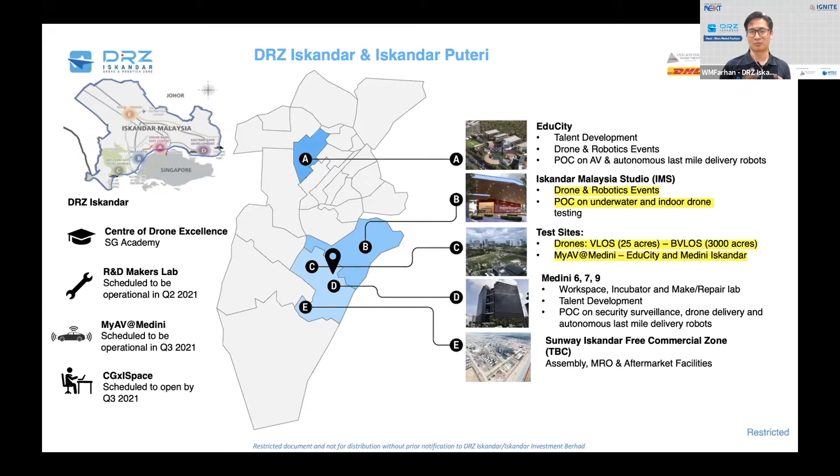In time, this is the community we would like to build. And if you are the end user or the client looking for any kind of solutions related to drone, robotics, or automation, come let us know, and we'll try to connect the right solution providers to you. Next, please. So specific for the drone, robotics, and automation solutions.

We have been talking to a lot of our industry and ecosystem partners, and as you can see here, the National Science and Technology Innovation Policy was recently announced together with the National Robotics Roadmap 2021 to 2030. Malaysia intends to become a high-tech nation, a sustainable, inclusive, and scientific society. For DRZ Iskandar, we aim to develop and support 70 drone and robotic companies within Iskandar alone, creating 1,000 high-value jobs, generating an investment value of up to 351 million.

Speaking specifically about the robotics industry, we've talked to our counterparts from Academy of Sciences Malaysia. They informed us that in Singapore, in terms of industrial robot density, a study by the International Federation of Robotics found there are 918 units of robots per 10,000 employees, compared to Malaysia's robot density of only 55 units per 10,000 employees. This is what DRZ Iskandar, together with MTDC, MIDA, and other ecosystem and industry enablers, is trying to help further develop.

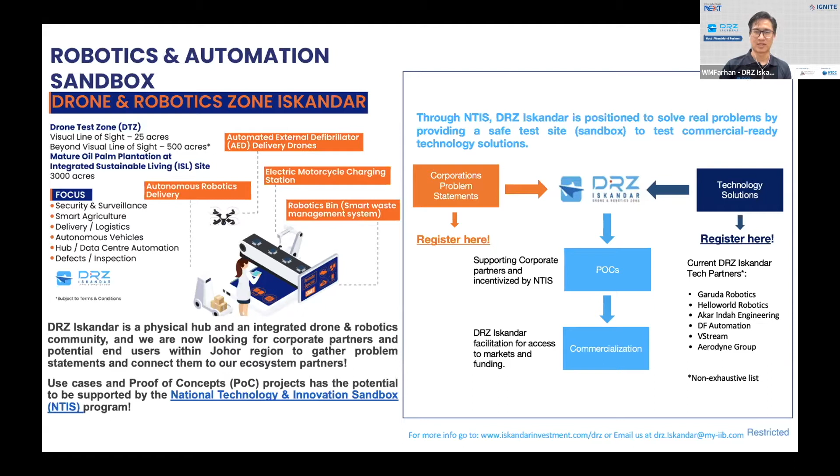All right, so I will stop there and I will introduce you to our next speaker, Mr. Jin Ng, the co-founder of Gigano Autonomous.

So briefly, Jin Ng is originally from Penang. He started studying E&E in UCSI KL, and after working with a Japanese MNC for 3 years, he was headhunted and relocated to JB and then joined a US company based in Singapore. Interestingly, it was during his time there that he got to travel around the world to perform on-site installation and training for clients, where he gained valuable experience in customer relations and technology in vision imaging inspection. In 2008, after conducting numerous robotics project installations, he spun off a startup company to focus on affordable robotics catering to the high mix, low volume sector.

This is where I think he successfully got funded from MTDC and produced a robotics arm, and this is where he created Gigano Autonomous. So I hand over the floor to you, Jin Ng, so that you can share about your products and solutions.

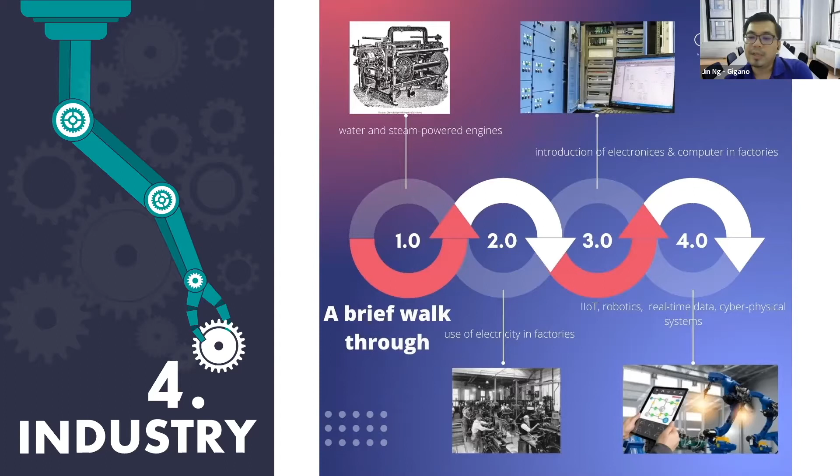We always ask our customers about the key metrics of adoption - whether they view it as an investment or a cost, because this is very important. If they look at it as cost, the adoption normally won't go far. But if they view it as an investment, that's a different story.

They also need to be committed from top to bottom, because synchronization and synergy are very important.

We always make our customers understand that adopting new technology is not about eliminating jobs. In fact, it actually creates more jobs. They must also be willing to upskill their existing workforce.

We let our customers know that no machines, robots, or technology can replace human dexterity, critical thinking, and multitasking, because the human being is an organic AI - the most advanced AI that we have in the market.

Of course, in order to have adoption, we also need basic infrastructure in place, such as connectivity - 4G and 5G in the future.

We always tell our customers that technology adoption is a journey. It's not something you buy, place, and then immediately see results.

For our definition of automation at Gigano, we branch it into two sections: front-end automation and back-end automation. So what is front-end automation?

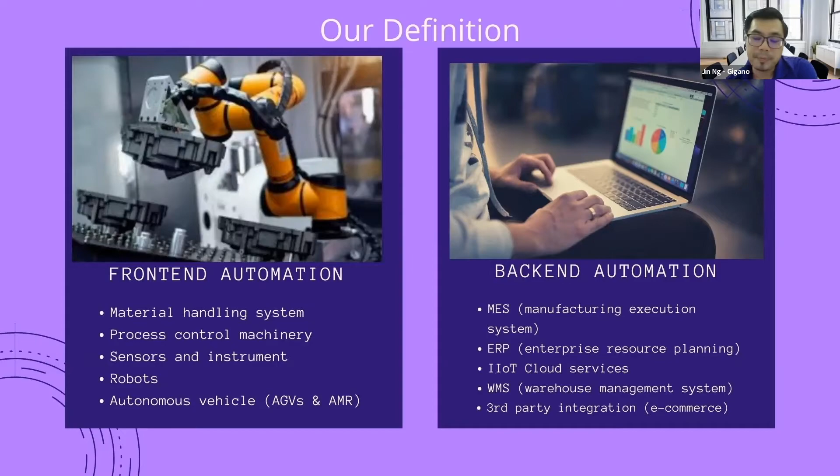As for robotics today, it has evolved from year to year. In the past, robotics were very simple, doing repetitive and tedious tasks. But now robots are enabled with IoT technology and features, so they can collect data relevant to the end user's requirements.

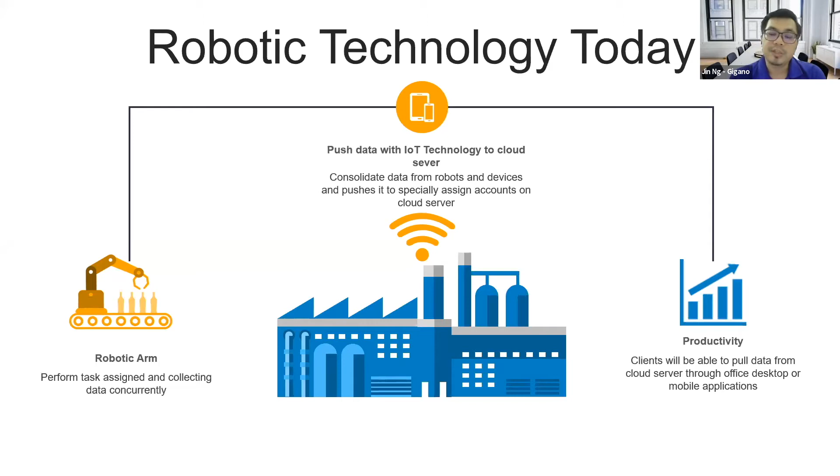A brief walkthrough on instruments and sensors - these are devices that measure and collect data, so that back-end automation can perform analysis and forecasting. Instruments and sensors are quite important in that they are the main players, the frontliners of the data.

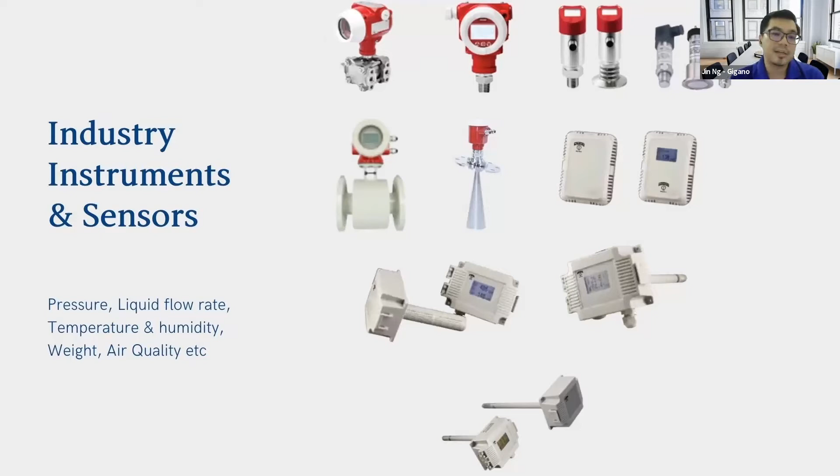As for IoT, this is a general idea - IoT can practically be deployed anywhere. We're not only talking about manufacturing; we can talk about logistics, retail, or even household. All this deployment, like sensors, instruments, and data, can be applied.

We then integrate with IoT devices called IoT modules or gateways, which send data to the cloud server, so end users can access this information or these parameters at their fingertips, either through a mobile application or a dashboard system. This is all back-end services, back-end automation.

As for ERP, full-fledged ERP can be branched into multiple sections - I won't go into the specifics. For back-end automation, we practically have barcoding systems, full-fledged ERP, POS systems - point of sales - and of course accounting systems, which most businesses already have.

And we're talking about e-commerce, the booming industry - so how do you link all this together? These are all back-end automation.

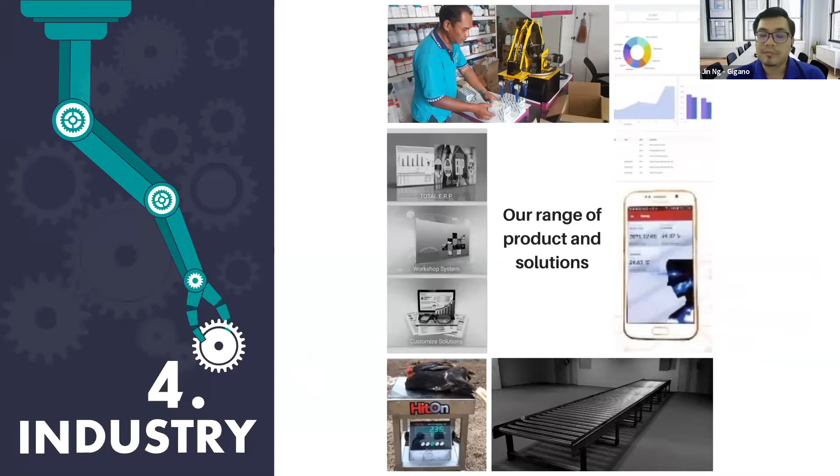So these are some of our products and services made available in the market. We are into robotics, ERP (enterprise resource planning), agriculture, and poultry systems. As for automation such as conveyors, these are the fundamentals of automation that we provide.

So we come to this. This is the most important part I'd like to share with you all, which is how do we apply all this technology I mentioned previously, how do we deploy it into the production facility, your retail, or your warehousing. So I'd like to share this video with you all.

The end user requires temperature reading from time to time, but that means they want this in real-time, so that if anything goes wrong, let's say it becomes kaput, faulty, at least they get the alert the first time so they can save all the vaccine, and by doing that they can also do some preventive maintenance.

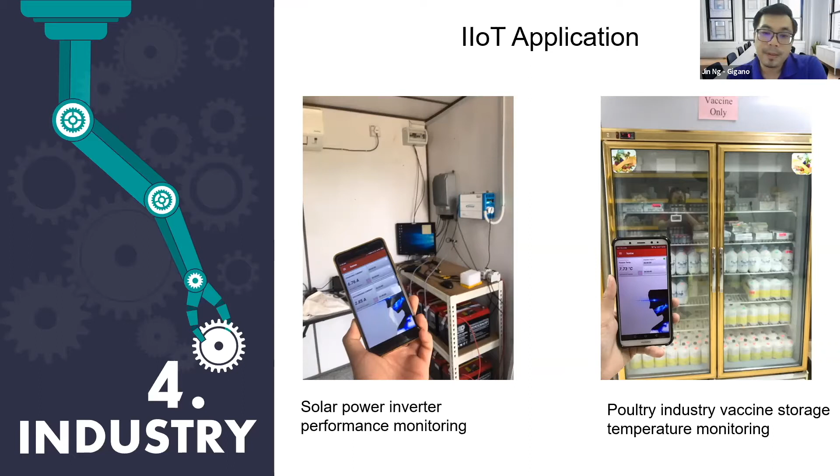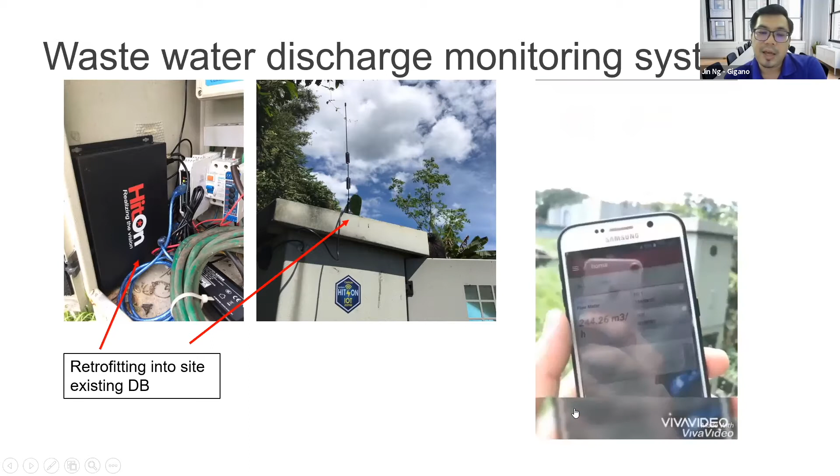As for this video I'm going to share, it's practically an implementation of IoT for back-end automation for wastewater treatment discharge. If you're from the manufacturing sector dealing with DOE, you'll understand that from time to time DOE will request data on how much wastewater has been discharged into the drainage system. This is where we deploy our system into existing machinery or sites, so they're able to track all this within their fingertips through a mobile application.

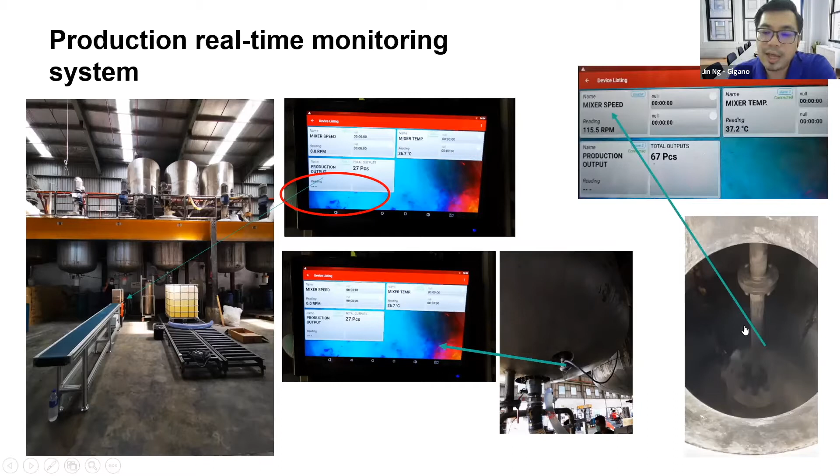So a brief background of what we do here: most of our technology is made in Malaysia, we are the IP holder, so we're able to do customization and are more flexible. Our philosophy is to focus more on retrofitting, because we understand that whether from the manufacturing sector or the retail sector, everyone is trying to save costs. So what we do is enhance your existing machinery or devices, so they can be more practical and save much cost on upfront investment.

So a little bit of sharing - this is some of our list of customers for robotic, IoT, and automation. Whether it's a local company or an MNC, we are also working with some government agencies. As for our back-end automation ERP system, these are the list of clients we have in the market - it can be from the OEM sector, F&B, even the semicon industry.

All right, thank you so much, Jin Ng. So next, we will have Dr. Iskandar Baharin, who is the Executive Chairman of T-Robot. Briefly about Dr. Iskandar, he has strong experience in robotics, starting from his PhD research in the UK in the late 80s. He then pursued his career with an international electronics company based in the US to build robotics automation lines for the global company, which was successfully commissioned for global production. After gaining experience in robotics and computer integrated manufacturing systems in the mid-90s, he ventured into the venture capitalist world to expose himself to the global financial and technological market. He's currently the executive chairman of T-Robot, or Tech Capital Resources Sdn Bhd, and is now focusing on building robotics collaboration models between Malaysia and other developed countries in robotics.

Assalamualaikum, how are you doing, Dr. Iskandar? I'm fine, thank you. All right, so I think you are also one of the members in the Academy Science Malaysia Robotics Roadmap, am I right? Yes. How do you find that out? We engaged them as well, and I realized that you are one of the team members in that. Yeah, one of the task force. I was one of the task force leaders in that.

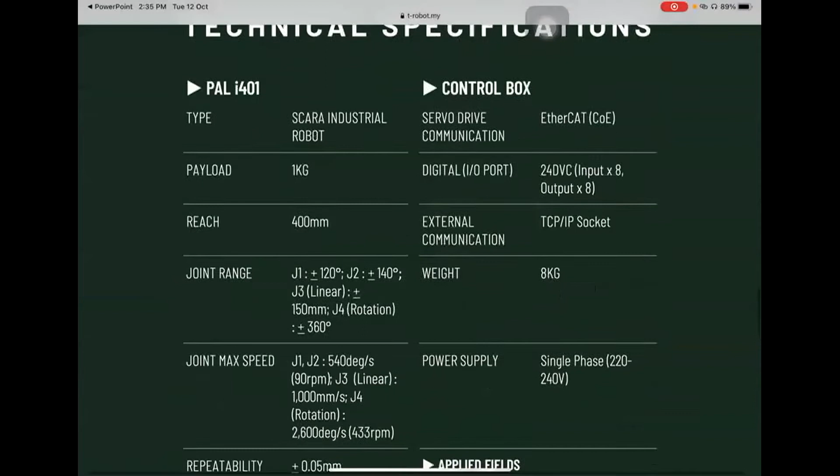We also go into what we call the robotics arm, collaborating with our Korean partner. We partnered with another Korean company that specializes in industrial grade SCARA robots. We went into this because we found that most SMEs cannot afford to buy a robot. Working with this technology from Korea, we localize the robot specs needed by local companies. We already have the frames, the controller, and the software, so after that it's just a matter of developing applications. We feel SCARA is the place for a lot of pick and place work, where a lot of foreign labor is involved, so we started going into that.

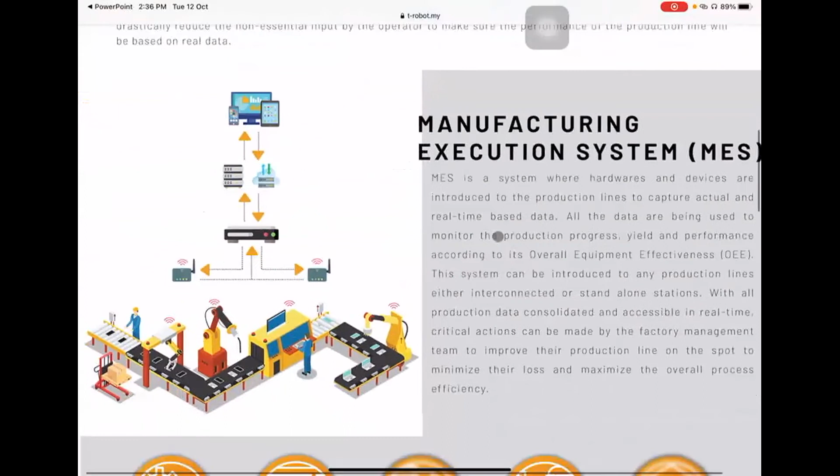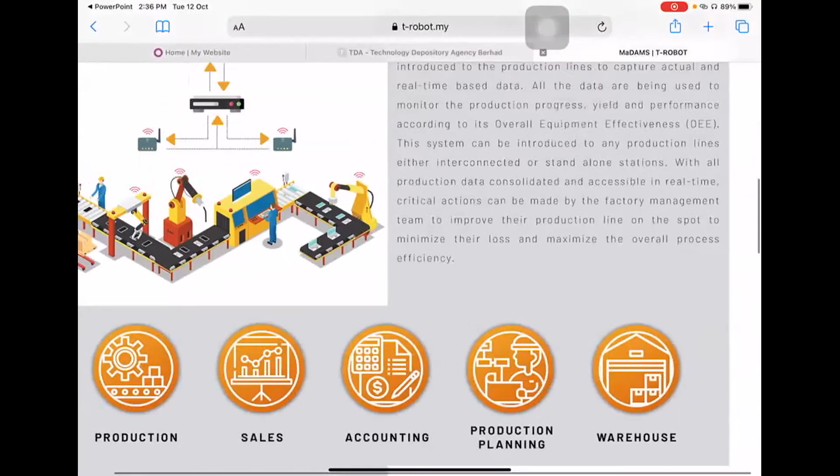The other project is more on the systems level - smart manufacturing, which is a very hot topic now. We talk about manufacturing data acquisition and management, so we also build MES platforms. These are the platforms we built. We currently have a customer, quite a big public listed customer, that we are serving with our systems. In terms of previous projects, we've done an automated electrode sorting system, smart agrobotic greenhouses which are very popular, smart seeding, and maintenance, repair, and factory automation. So basically, in-house, we have developed local capabilities.

What I want to share is, looking into the future, what T-Robot wants to be - a company recognized with the capability to build and fabricate an artificially intelligent robot. Right now in terms of robotics, we have the expertise to build a robot, where a robot is nothing more than a machine with a physical form. At the same time, we have a team looking into artificial intelligence, which is a software and doesn't need to be physical - especially now with RPA, robot process automation, and AI bots, which is a growing field. So if we combine robotics and artificial intelligence, as T-Robot we will be able to build our own AI software plus robot machines, which we call artificially intelligent robots.

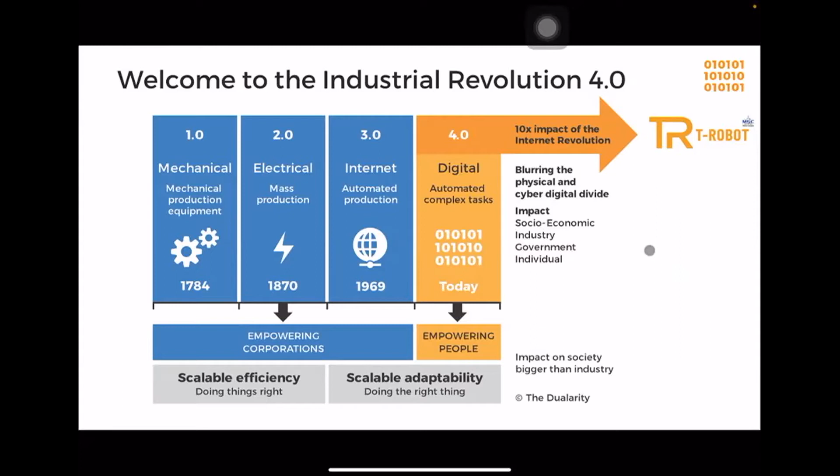So this is basically what I have today in terms of trying to share. Okay, my final slide.

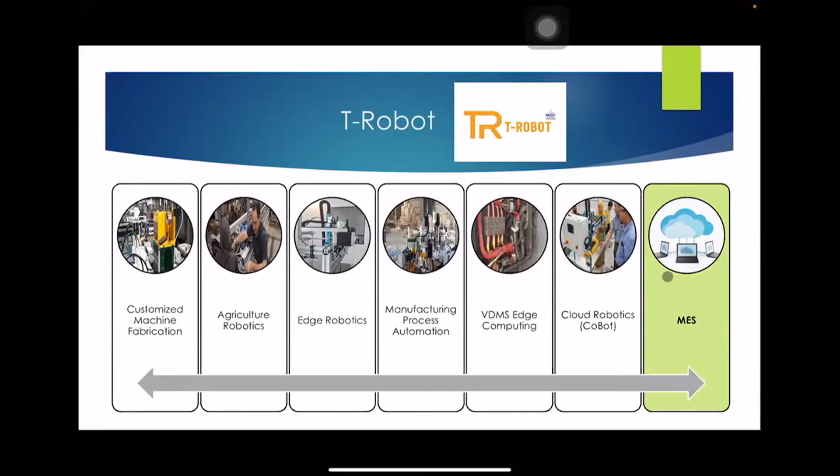I'm hoping that there'll be a lot of interest from our meeting today in terms of how we can add value to our customer. So I think with that, I would like to end my presentation here. Thank you.

Thank you so much, Dr. Iskandar, I think that's a really good presentation. I used to work for the government agency that manages MSC, and I'm sorry for not knowing that T-Robot is part of the MSC companies. And prior to that, I was working for a manufacturing facility company based in Pasir Gudang as well. Every time we plan, because in manufacturing line, we always try to improve and do R&D, a lot of the companies that we engaged before came from outside of Malaysia. We were not aware, or not connected with the local automation and robotic companies that actually have this kind of capabilities.

Today I would like to share with you about autonomous mobile robot, or in short, AMR. Let's start with what is AMR. Autonomous mobile robot is a combination of two segments, which is autonomous and a mobile robot.

Autonomous means independent and having the power to make its own decisions, while the mobile robot is a robot capable of moving in its surroundings, like locomotion. So it doesn't matter whether it uses a set of wheels, a tank track setup, or any leg mechanism, as long as it moves on the ground, we can call them mobile robots.

By this, we can also explain AMR is having a unique ability to navigate in an uncontrolled environment with a higher degree of understanding of its surrounding via a set of sensors and AI, artificial intelligence, compared to AGV, which is also a mobile robot, but it uses magnetic line as a guide to navigate.

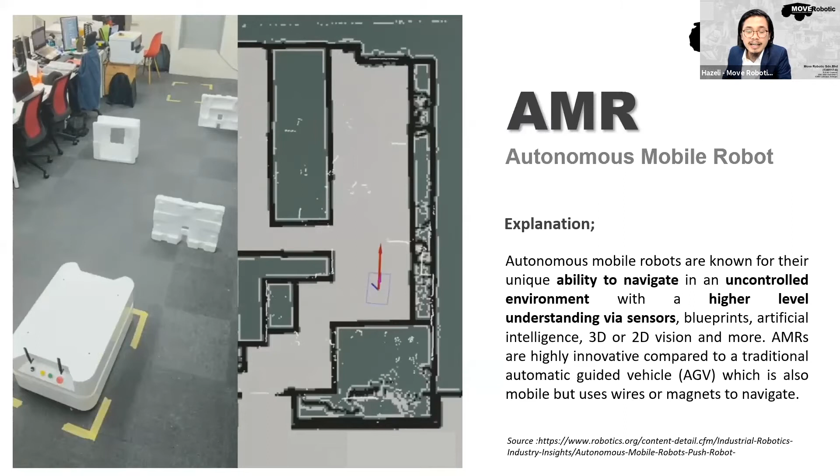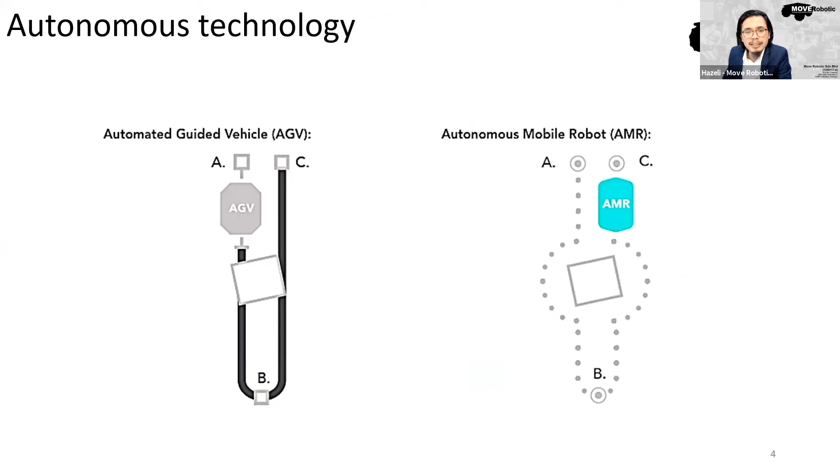Autonomous technology allows mobile robots to move more freely and independently, which can avoid any obstacle on its path and continue to complete its tasks, whereas AGV needs to stop and wait until the obstacle is removed. I believe many of you are familiar with AGV, automated guided vehicle, which is widely used in industry, like production factories and also warehouses.

Let's go deep into the comparison between AGV and AMR. First is navigation. AGV uses a guided method, while AMR uses trackless natural navigation.

Secondly is the ability to avoid obstacles. AGV has to stop when an obstacle is in its path, while AMR is capable of moving around the obstacle and finding the best path toward the destination goal.

Thirdly is flexibility. AGV needs a new installation of a guided path in order to make a new path, while for AMR we just need to scan a new map of the new environment and assign a new position using a fleet management system software.

Next is the cost. AGV is surely less expensive compared to AMR. This is due to AMR using a set of complicated sensor fusion and sophisticated autonomous control systems. The most common sensors used in AMR are 2D LiDAR, IMU accelerometer, and wheel encoder. More advanced AMRs use 3D LiDAR or multi-depth cameras.

But even though AGV is much cheaper, the maintenance cost of the magnetic guided tape is quite a challenge in the long-term perspective, whereby it has to be changed every 6 or 12 months depending on the environment. So this will add up the maintenance cost of the AGV.

The next comparison is installation complexity. AGV requires more complex and time-consuming installation rather than AMR, which is fast and easy to deploy.

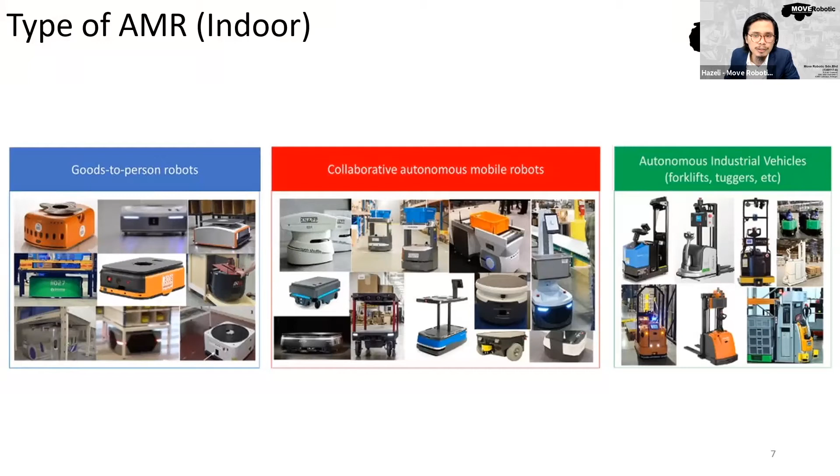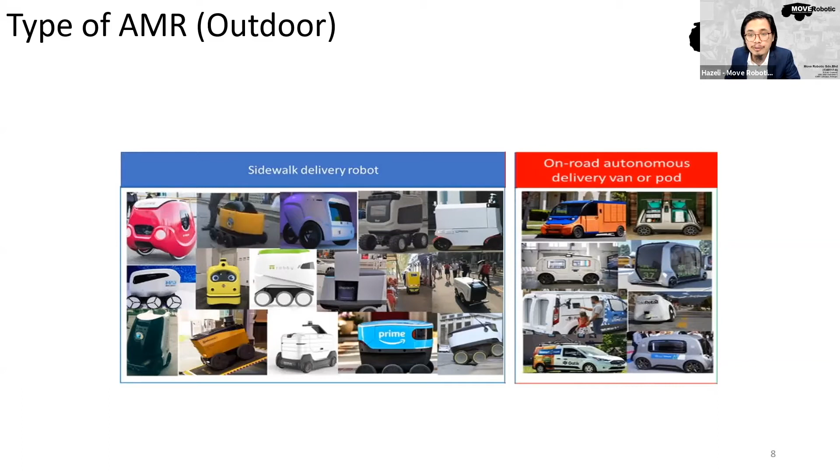We can see there's two different environments here, on the sidewalk or on the road. They're using the same autonomous system, but to run on the road it requires a very high level of safety standard, similar to autonomous vehicles, and have to pass through a rigorous test before they can be deployed on the road. Okay, let's look at the market size of AMR.

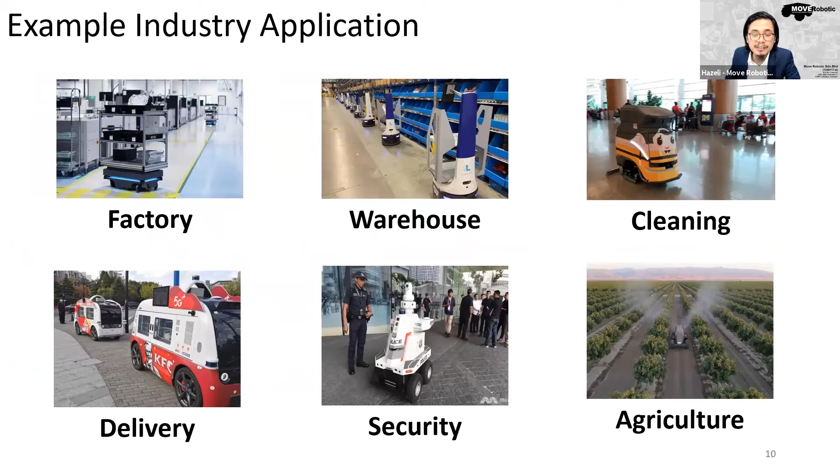Okay, these are some examples of AMR from various industries. We have factory, warehouses, cleaning services, delivery, security, and even agriculture.

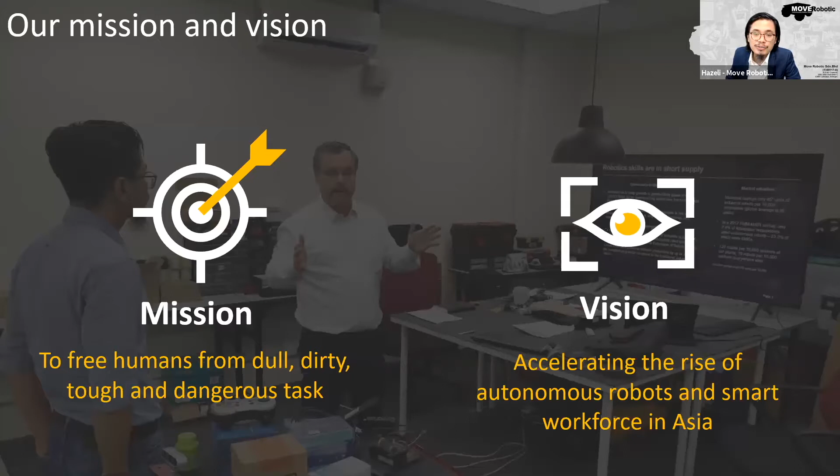So Move Robotic, who are we? I can say that we are more of an R&D company focusing on autonomous technology and mobile robot technology. Our objective is to harness the power of robots. Our mission is to free humans from dull, dirty, and dangerous tasks. And our vision is to accelerate autonomous robot and smart workforce in Asia.

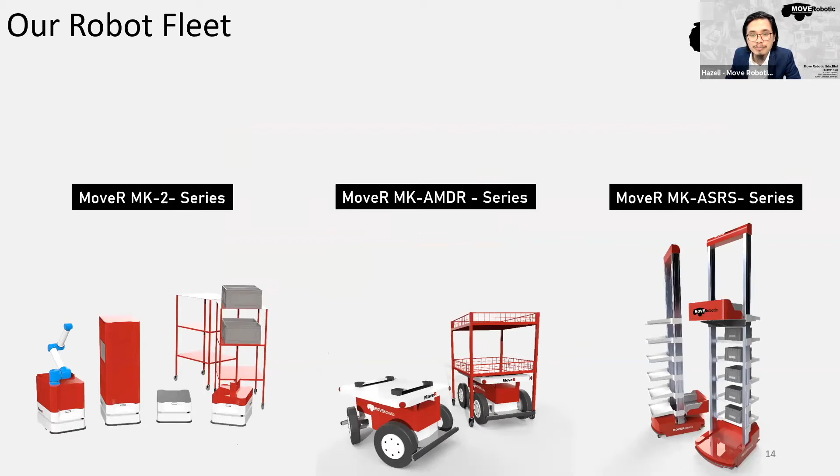So introducing our own solution, Mover, an autonomous robot fleet self-developed locally by Move Robotic. We have indoor autonomous mobile robots, outdoor autonomous mobile robots. The latest one is our goods-to-person robot, which can pick up a container from the rack and deliver it to the person.

All of these robots use our own controller board inside and our own custom fleet management system, all developed locally. What we do here: we design the mechanical and electronics board, we do our own programming, our own motor control and navigation, and everything ourselves. So customization is not a problem, we can develop small or big autonomous mobile robots.

Our roadmap this year is focusing on indoor applications. Next year we'll be focusing on outdoor applications, and also move towards agriculture and on-the-road applications.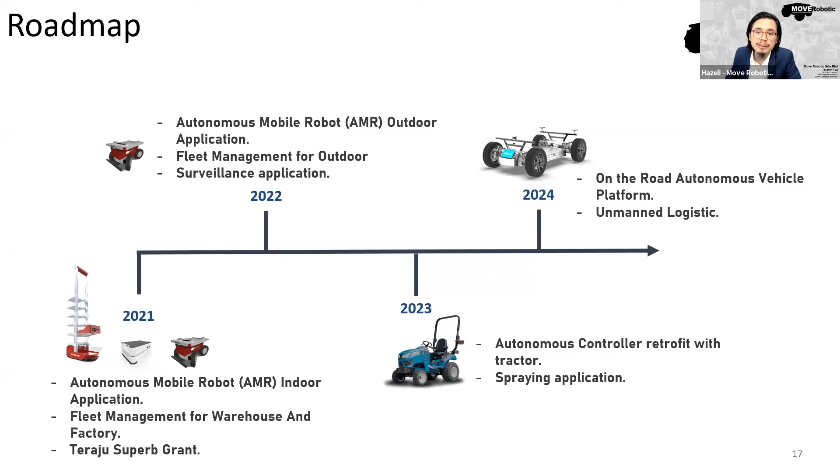So we invited all of you here to come to our Autonomous Training Center at MTDC UPM Serdang, where we develop with MTDC. Professional engineers, technicians, or students can come here and learn about the technology inside AMR. So please visit our website and contact us for further information.

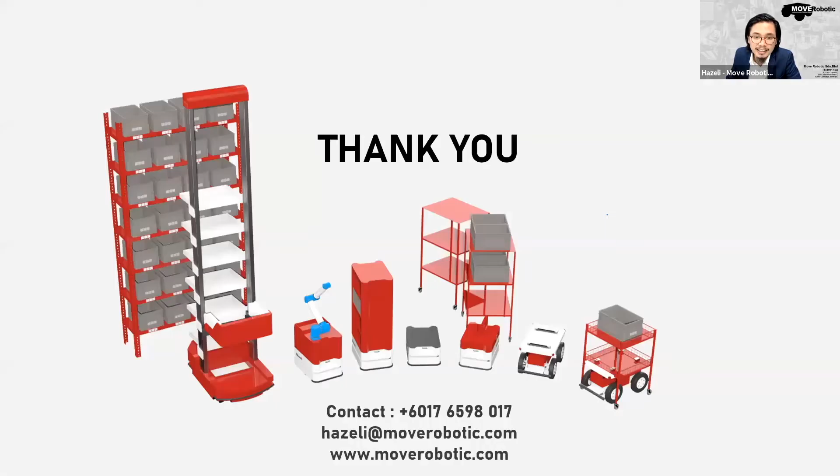This is our contact information. Easily you can find us on Google, just type Move Robotic and you'll find www.moverobotic.com. I think that's all, back to you Mr. Farhan.

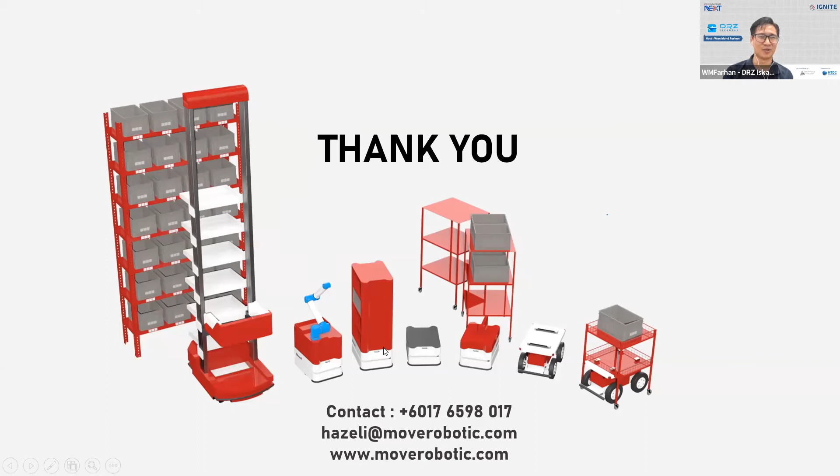Thank you so much, Hazeli. I think congratulations as well, if I can. All of the achievements that you and your team have made, and good luck for your program with Petronas. Yeah, inshallah, it is still currently ongoing? Yes, correct, every day. All right, great, all the best and good luck. Thank you so much, Hazli.

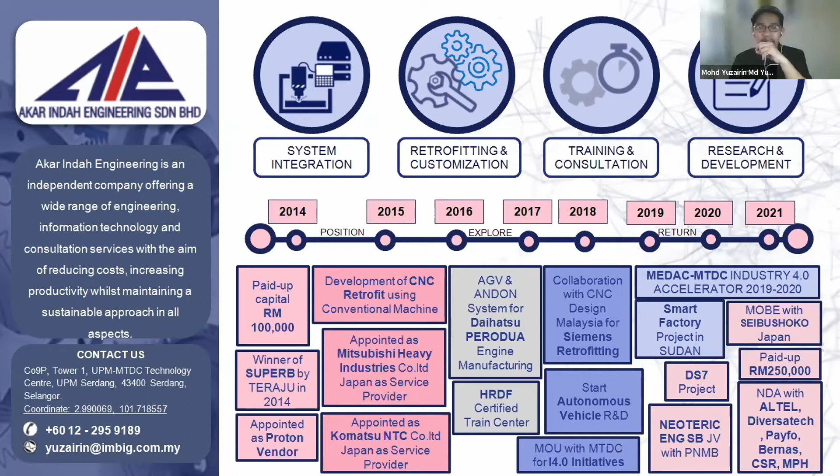From 2019, we have collaborated with MTDC to help SMEs in Malaysia adopt Industry 4.0 solutions in their business and operation. Until now, we have trained more than 600 SMEs, and 200 of them have become adopters of Industry 4.0.

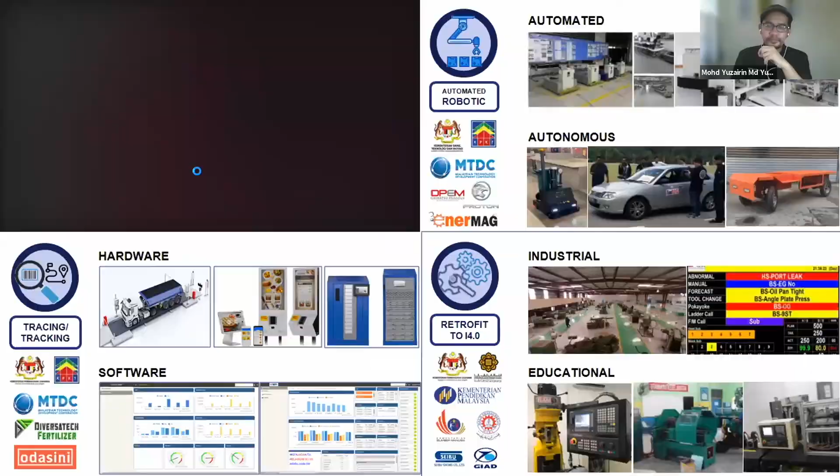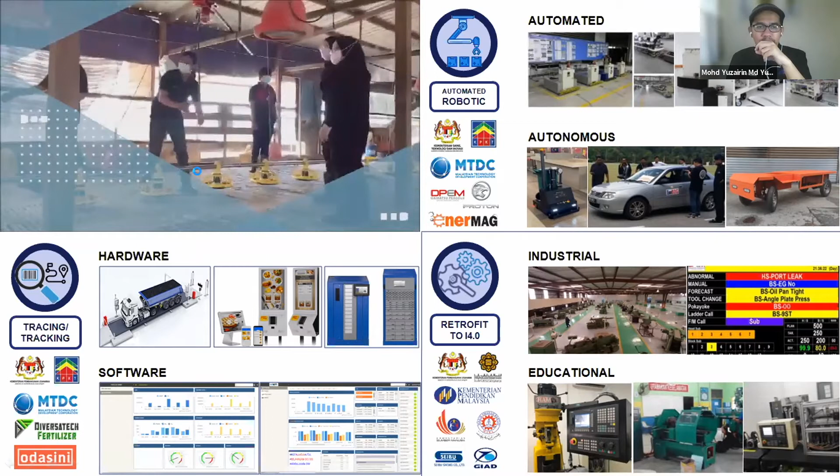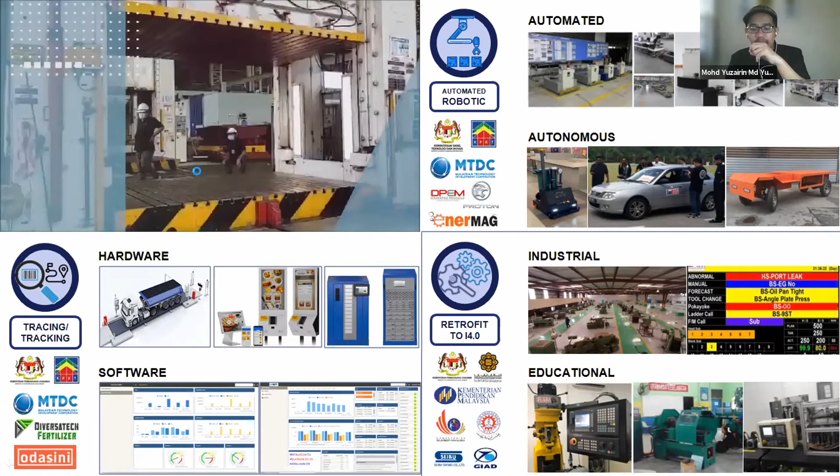I hope you can see the video moving. AISB's core business is mainly divided into three main categories: tracing and tracking, consisting of hardware and software development; automated robotics for manufacturing and services sector; and machine retrofit to I4.0 for industrial and educational purposes.

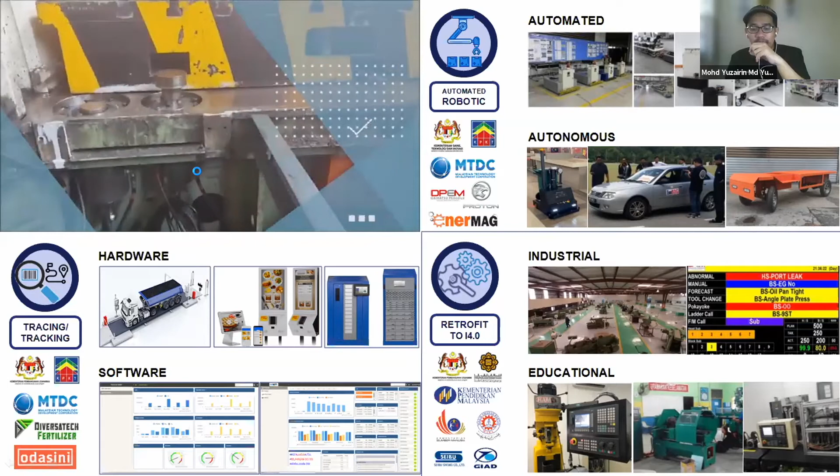Our experience and expertise allow us to serve clients with total solution from designing, developing, manufacturing, until integrating with existing machineries and equipment. We also provide after-sales service and maintenance.

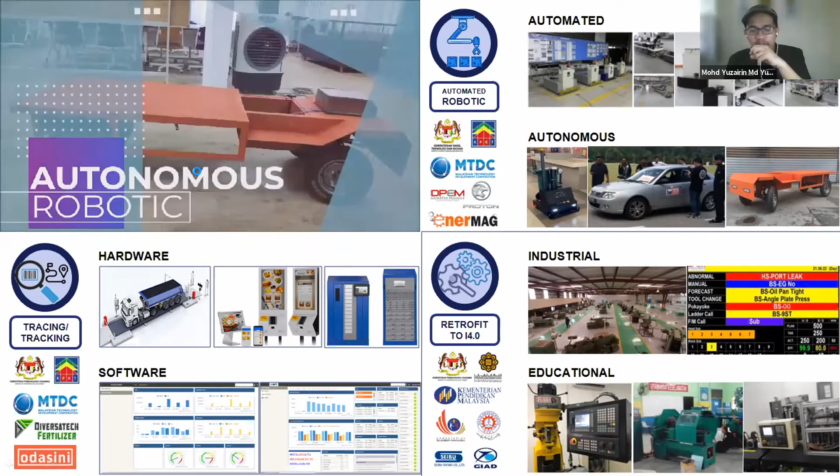Data from Bank Negara shows that Malaysia's productivity is low comparing to our foreign affiliates. If we compare to Singapore, we lose around RM 180,000 of potential value added per worker, or about RM 360 billion of revenue to the national GDP. This is because of our dependency on low value added resources such as foreign workers and manual processes. This is why robot as a service is a way forward for your business.

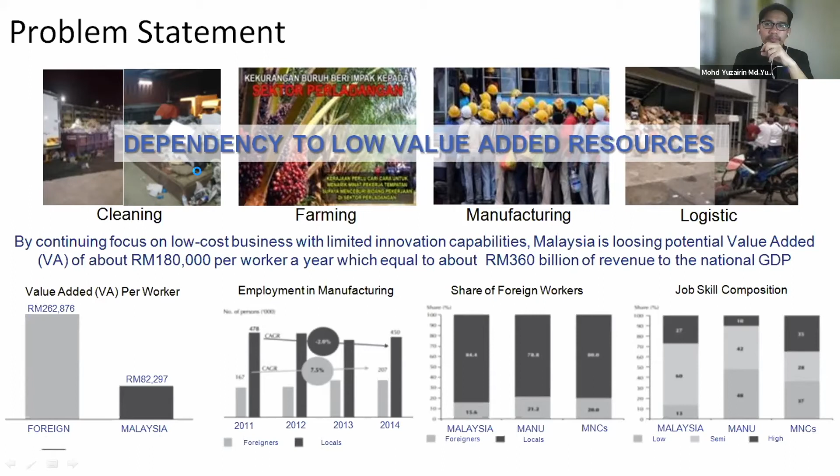Today I would like to focus on automated guided vehicle, as explained by Encik Azli just now. The AGV is different from autonomous vehicles due to it being guided. You can use either magnetic or color tape for the guidance, and sometimes we also use a rail as a guide.

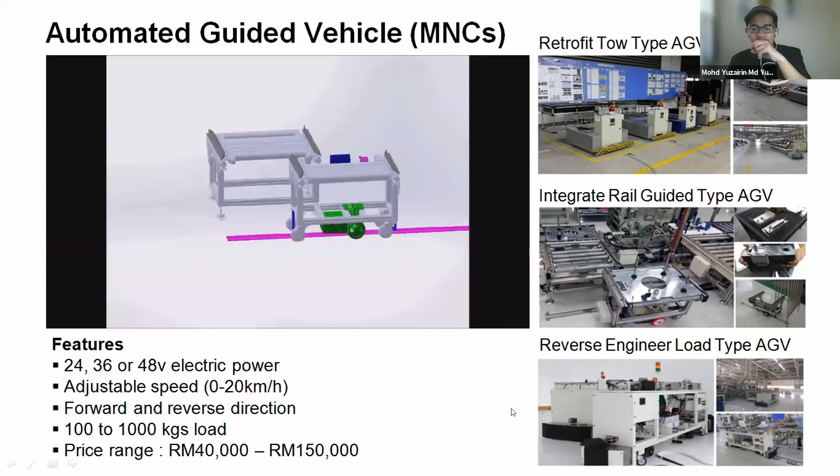For your information, AISB started our journey in this area by retrofitting old AGVs. We upgraded them with the latest motion parts, controller and sensors to make them more reliable and efficient. We have clients mostly in the automotive industry.

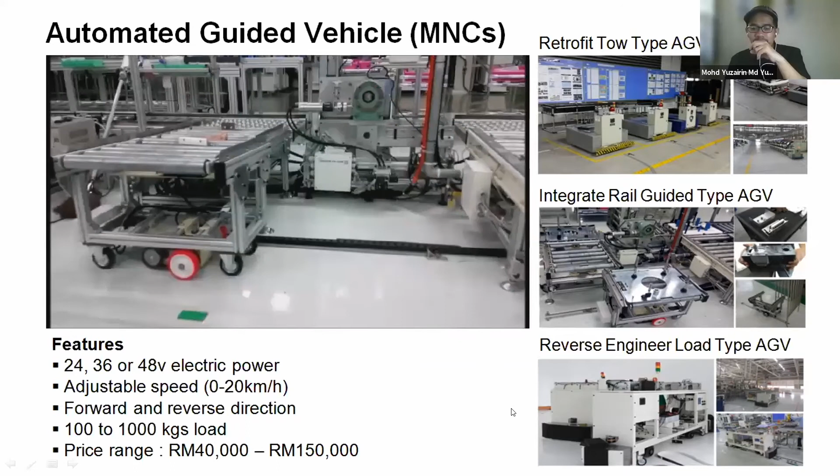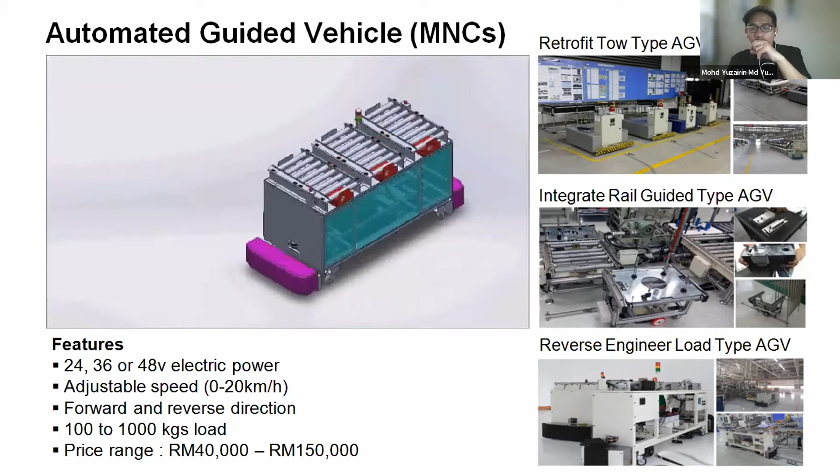Then we started developing an AGV that replaced the conveyor, especially in manufacturing lines. This helps clients save space and have a smarter handling system. Our AGV is customizable based on client application, able to carry loads between 100 kg to 1 ton, and our price is between RM 40,000 to RM 150,000 based on the size and features required by our client.

As you can see on the video, this is used for the automotive industry. We have deployed our solution since 2016, and until now we have had no experience of problems, whether hardware or system.

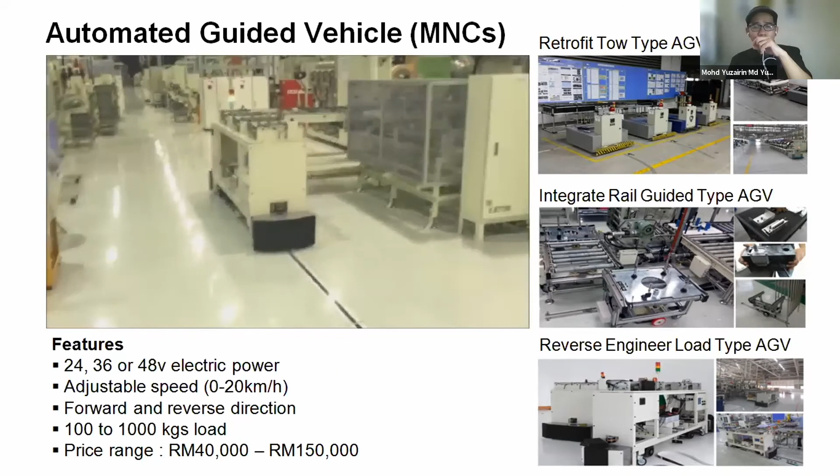Basically, the products that we have normally follow the industry level standard. Of course, from the safety side, we have obstacle sensors and also safety features. If you see the black one, that is the safety bumper. So if the obstacle sensor doesn't properly work, the safety bumper will make sure that mechanically the AGV will stop without hurting a human.

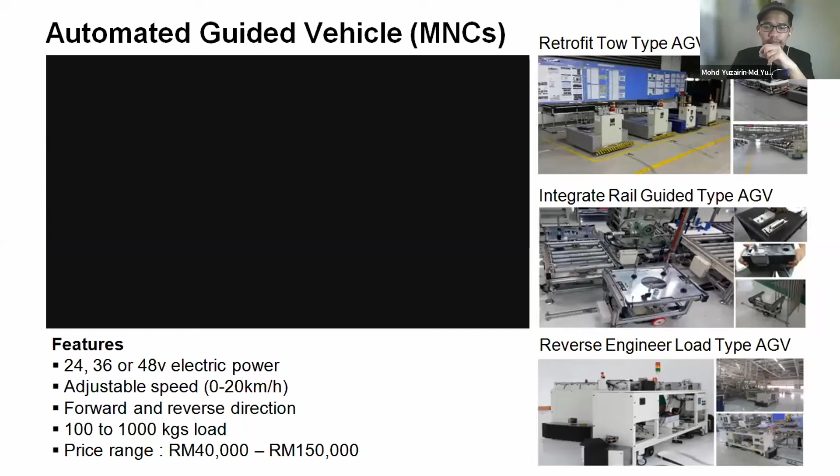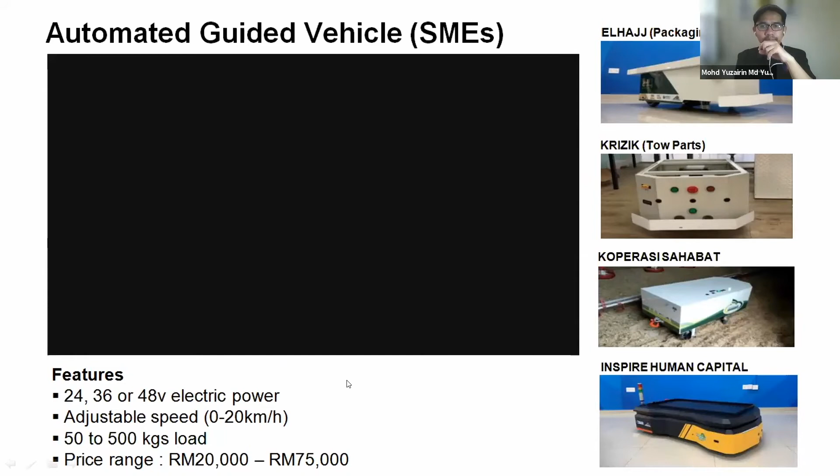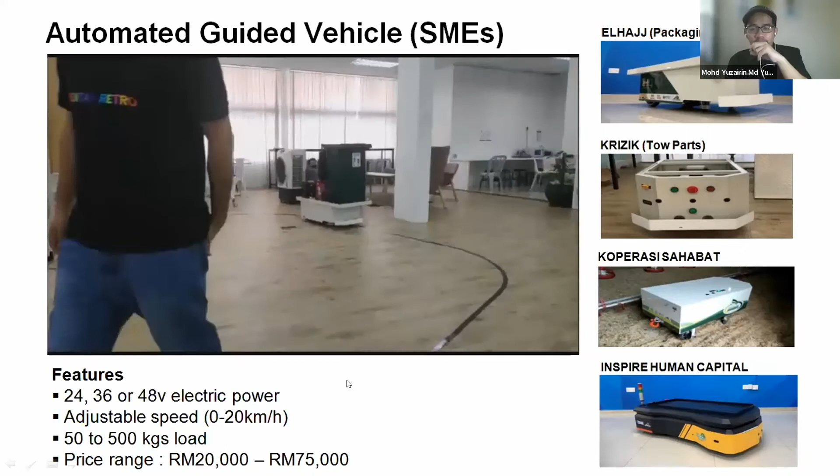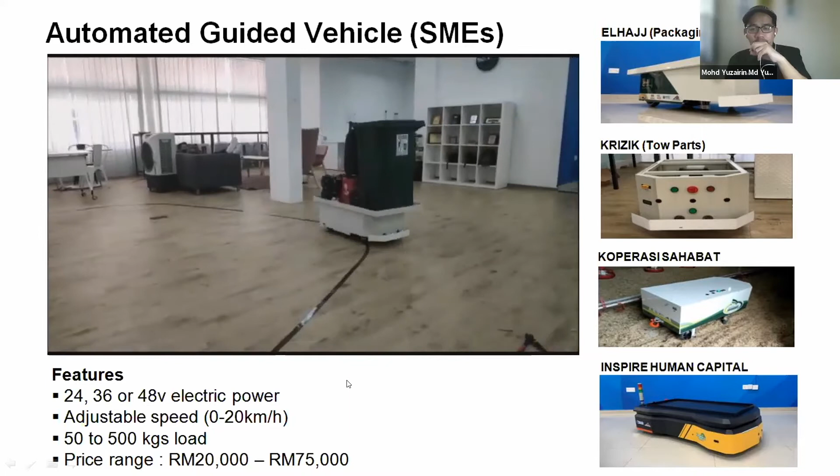Besides that, last year we also started to develop AGVs suitable for SMEs. Currently we have clients from SMEs such as ELHAJJ, where they use the AGV for their packaging line. Krizik has the tow AGV to tow their electrical parts. Koperasi Sahabat uses the remote control AGV to handle their chicken farm, and Inspire Human Capital uses our AGV to carry milk in their goat farm.

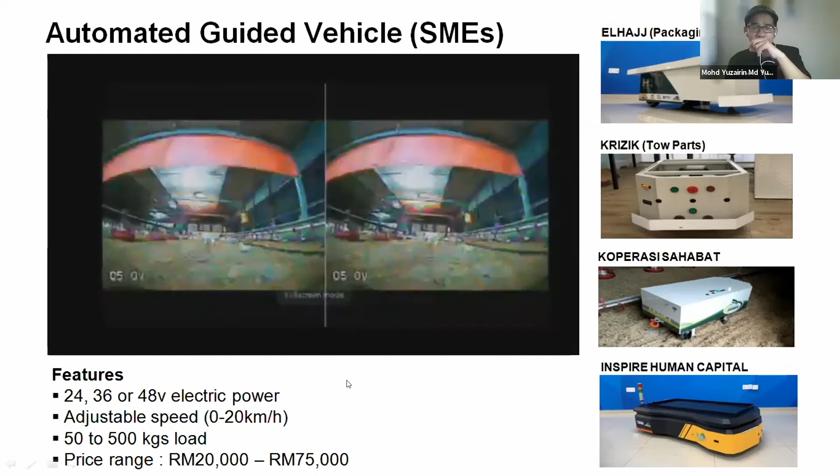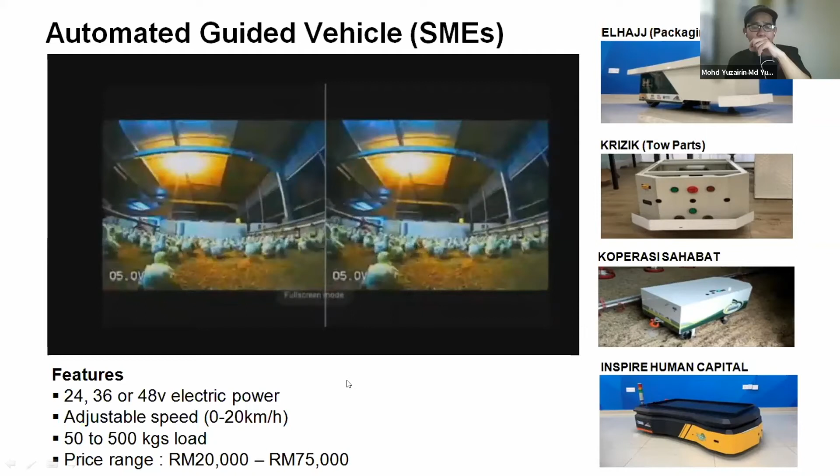As you can see in this video, this is currently used by Koperasi Sahabat. They use the robot, controlled and monitored in real time, so that they can apply the use of the robot in their chicken farm, especially for the small chicks. It would be stressful if humans always went into the farm, so by using the robot, the stress to the chickens is much less.

For this kind of AGV, we only build for loads between 50 kg to 500 kg, and the price range is between RM 20,000 to RM 75,000.

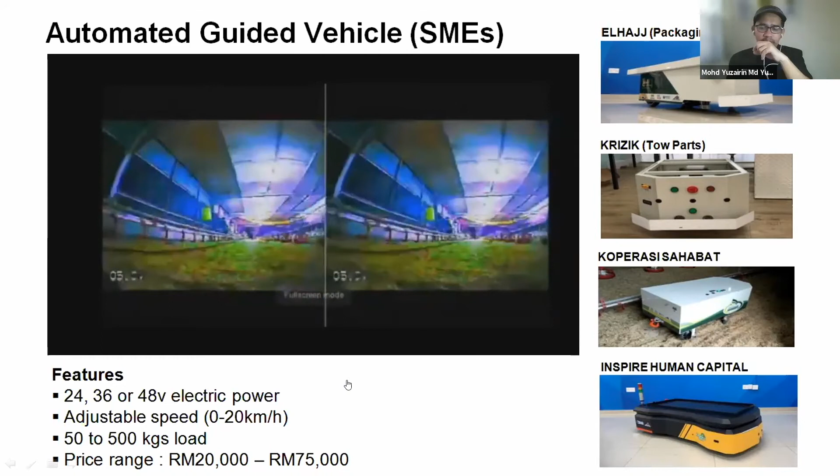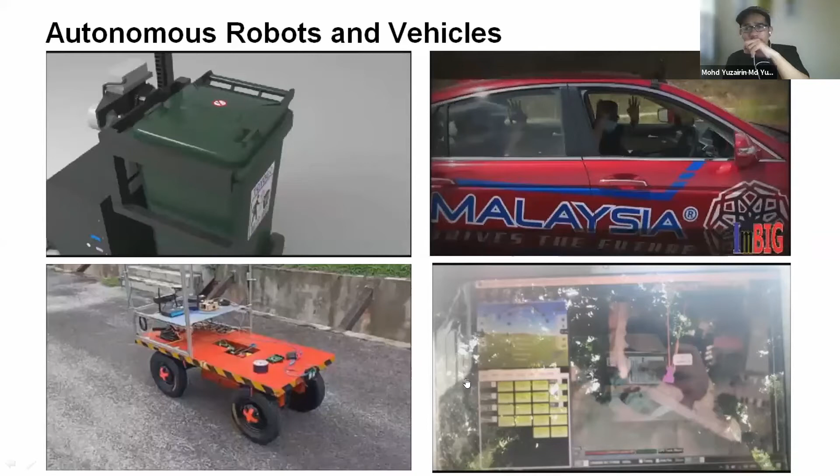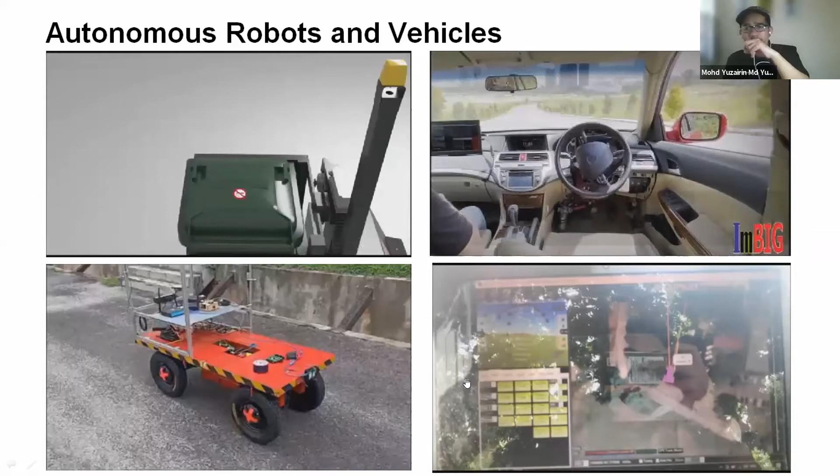We also developed our local autonomous car in collaboration with Nano Malaysia Berhad. This car is being tested in TPM, and currently we are able to drive the car safely at 40 km/h.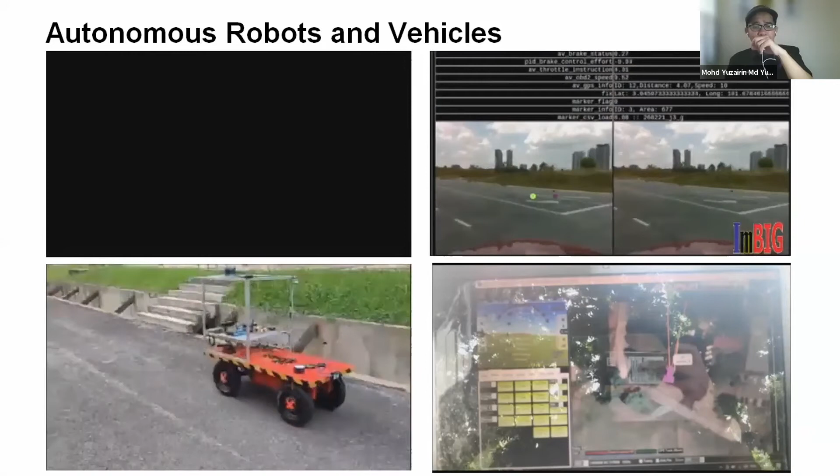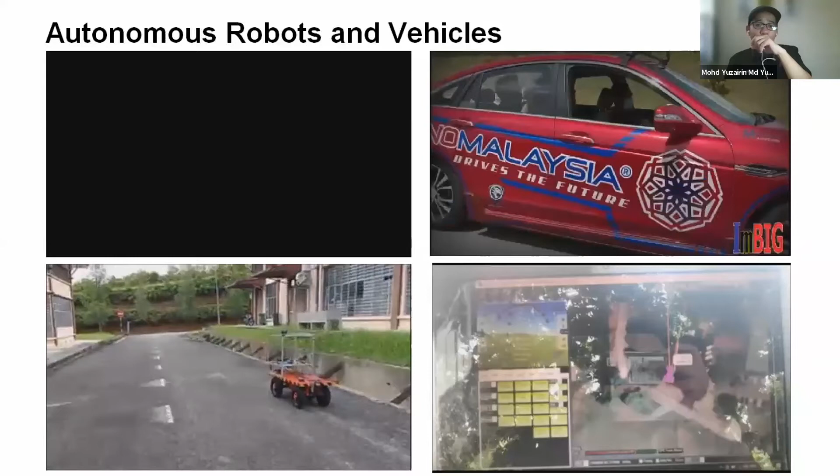Besides that, we also develop an outdoor autonomous vehicle. The first one is currently used for education purposes. We supply this training kit to technical and vocational education centers so they can develop local talent for the autonomous vehicle sector. Hopefully by doing this we can attract more investors into Malaysia, because we have good talent in this area.

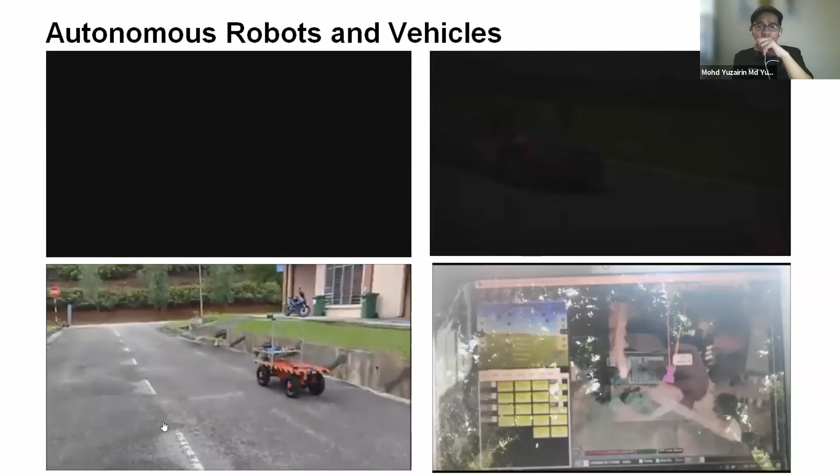The last one is what we call our electric autonomous cart. Currently we are still at the R&D level. We intend to use this platform for agriculture purposes, and as you can see on the screen, we use GPS technology for maneuvering and navigation.

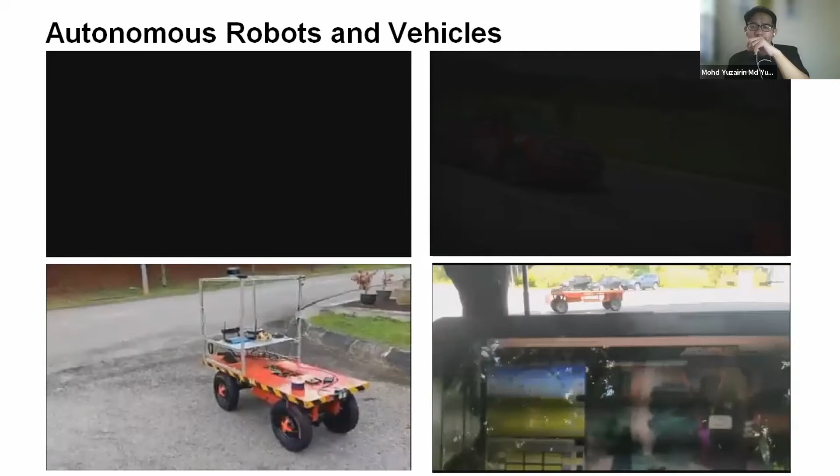Actually, we try to focus more on easy-to-access technology and affordable pricing, because our experience tells us that if we focus more on the technology side, we can give the best features, but when we want to enter the market, it becomes difficult if the price is not affordable.

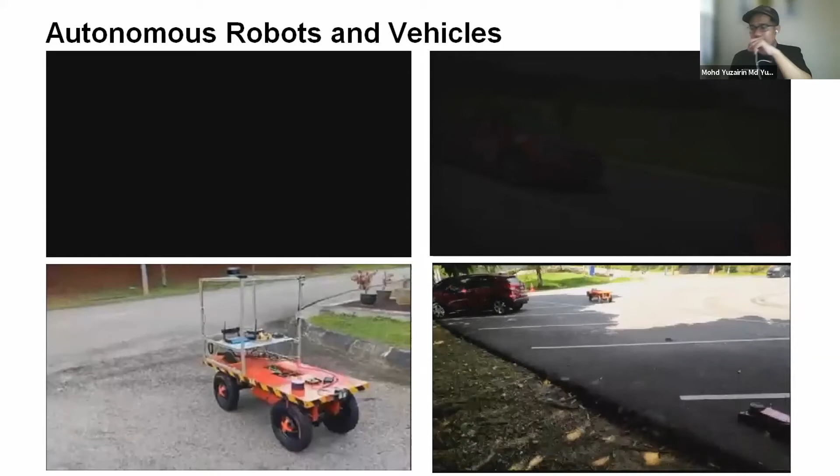So that is my presentation for today. We have the best management and technical team in this area. We have developed more than 20 solutions related to Industry 4.0, currently available not only for big corporations but also for SMEs.

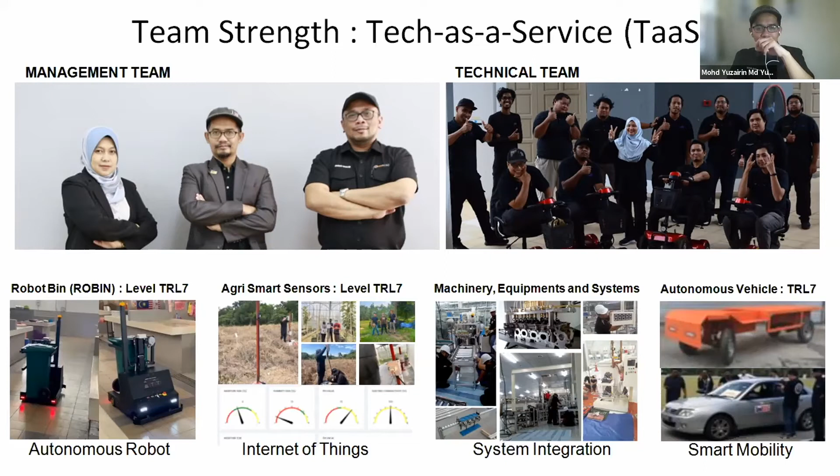As I mentioned, we focus more on easy access technology and affordable price, so we believe we can offer a very good solution locally. We also provide this solution in leasing mode, where on average our clients can pay around RM2,000 to RM4,000 a month to have all this solution installed in their premises. So thank you very much. That's my 15 minutes. Thank you.

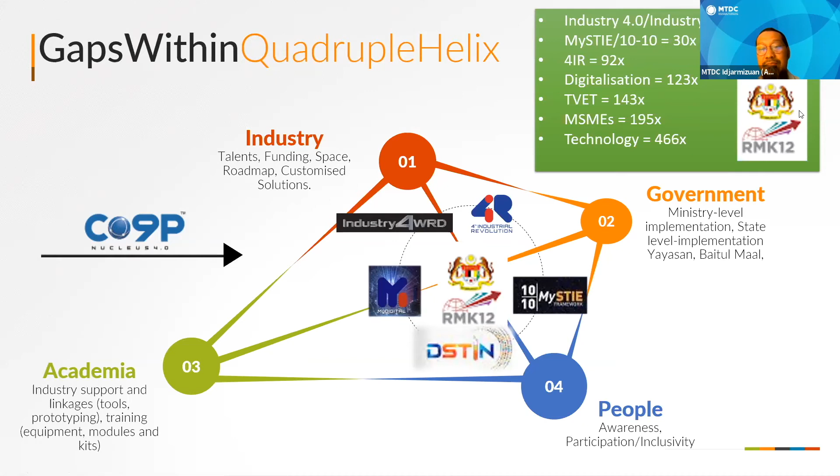So in a nutshell, our CO9P, we want to expand it to other parts of the country, and we are lucky to have Iskandar believe in us and replicate what we do in Klang Valley, bringing the CO9P business model to Iskandar. We hope one day they will be able to produce all the things we have been producing at our center, which is industry support.

We have specialized I4.0 hubs. We have some funding support. We have ample co-working space. We do community networking, and we are reviving it.

We had a problem when the pandemic came because everything had to be done online. But now, since we have eased up the movement procedures, we hope to revive the plans we wanted to do, so there are more community-based programs where we can network with each other. We want to bring all of our local talents, services and solutions to the international market.

Akar Indah has connections in Japan and the Middle East, and I'm sure the others have similar connections. We hope to work together in this community. We are focusing on training and certification all the way from TVET to working people in factories and offices, on new digitization and digitalization approaches. Most importantly, CO9P should gather the expertise to provide customized solutions tailor-made to the requirements of our local SMEs, whether process or financial requirements. So we hope to help Iskandar realize this at the southern end, while also focusing on the eastern and northern Peninsula, as well as Sabah and Sarawak.

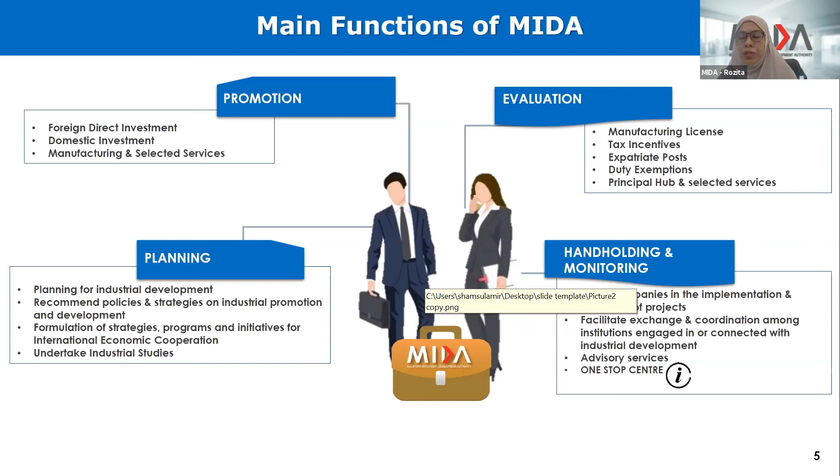Okay, the first grant is the Industry4WRD Intervention Fund. But before a company applies for this fund, they have to first do a readiness assessment. Readiness assessment is through online registration with MITI. This is open to all manufacturing companies and also manufacturing-related services companies.

For example, some of these participants may be SMEs from the manufacturing sector, and some may be from what we call MRS, including system integrators. If you are SMEs, there is no fee charged to the company. This readiness assessment is very expensive, and it is actually paid by the government. The first thing you have to do is online registration, and there will be a team to assess your organization. They will identify the areas your company has to improve.

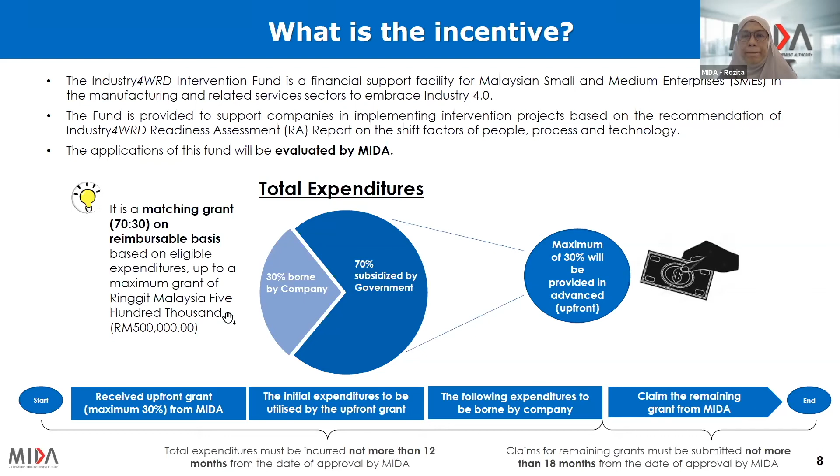And then the next one is the eligibility criteria for SMEs, and the most important one is it must be 60% Malaysian.

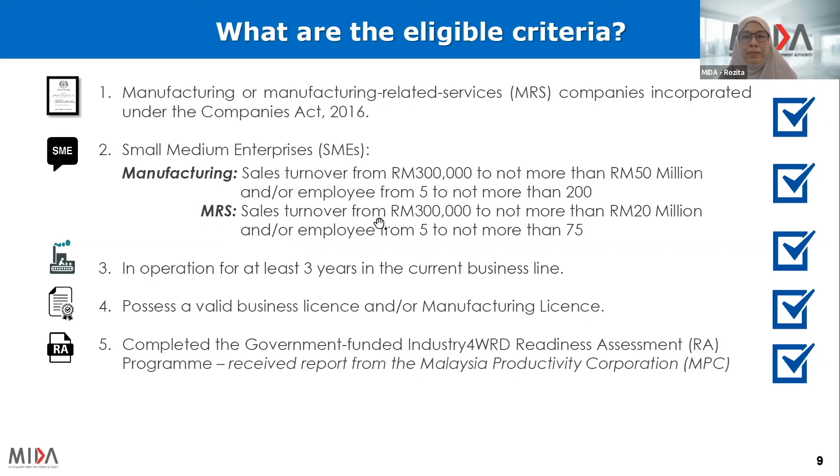The next fund is Domestic Investment Strategic Fund, DISF. There are two types: the normal DISF, and the Industry4WRD DISF. DISF was introduced in year 2012, so this is a very established fund at MIDA compared to the previous intervention fund. This is matching funding, meaning 1-to-1, 50% from government and 50% from company. The most important criteria is that it must be a Malaysian company with equity ownership of at least 60%.

This grant is still available. The next one is Industry4WRD Domestic Investment Strategic Fund. To apply for this grant, the company must undertake the Industry4WRD Readiness Assessment, the one I mentioned earlier. This is still available until 31st December 2021.

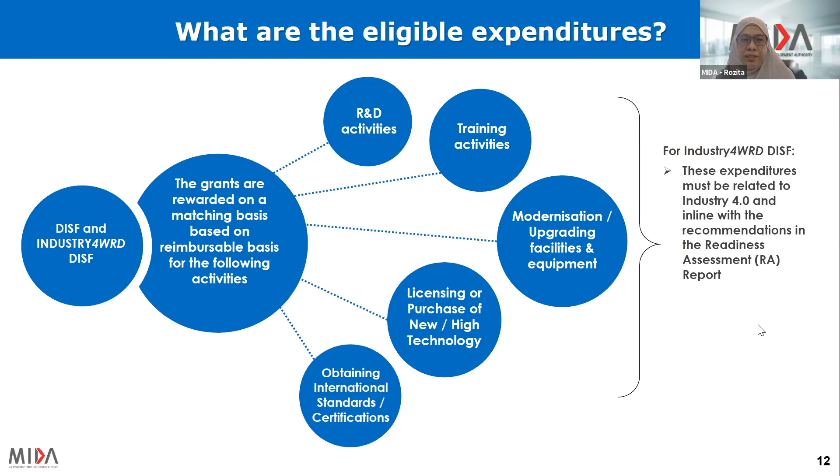So the last available grant under MIDA is the Smart Automation Grant, our latest grant. Unfortunately this is the youngest one, but when we launched it last December, by August we received 500 applications. The 100 million ringgit allocated by government is already fully subscribed by these 500 companies, so we had to temporarily close the application. But don't worry, we are applying for more funds from MOF, and hopefully they will announce this under Budget 2022.

This grant is for SMEs, services, and manufacturing companies. It's open to Malaysian companies with at least 51% equity, incorporated under the Companies Act, and it's not for new companies but for companies already in operation for at least 12 months.

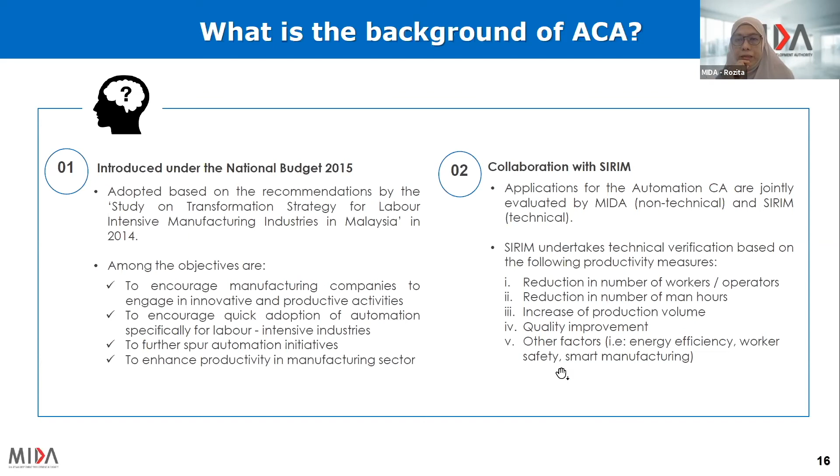Under this incentive, there are two categories. Category 1 is for labor intensive industries, and we have identified 5 labor intensive industries under MIDA: rubber, plastic product, wood product, furniture and textile. Category 2 covers other industries such as fabricated metal, E&E, chemical, transport, food and others.

This incentive is very lavish, actually. This is the first time MOF provides capital allowance at the rate of 200%. For labor intensive industry the maximum amount is 4 million, and for other industries it's 2 million. That means if a company utilizes the maximum 4 million, the allowance given will be 8 million. This is valid for 8 years, from year assessment 2015 to 2023.

Under Budget 2020, this incentive was also opened to the services sector, with the same rate of 200% but the maximum amount is 2 million ringgit. The definition of incurred here is when a company can claim this incentive once they have bought the machinery and equipment and installed it within the approved year of assessment.

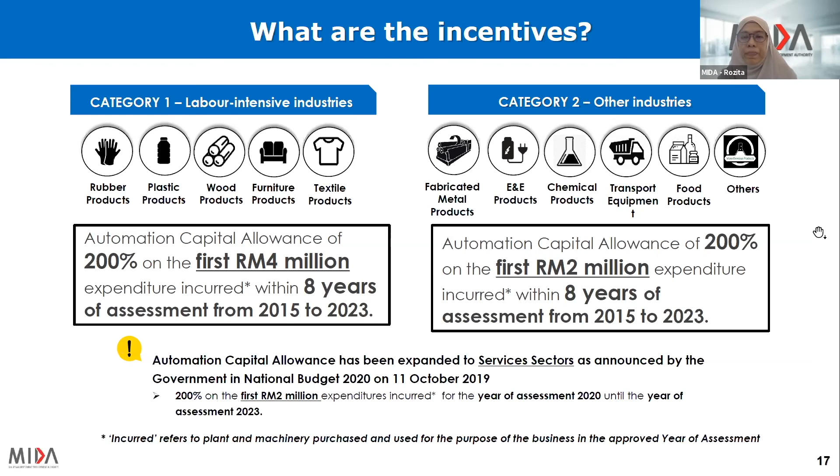I think what I tried to explain just now is a little bit technical, maybe for first timers, but some of you may already be enjoying or have already submitted applications to MIDA. For those who are not familiar, all the forms and guidelines are available on the MIDA website. So we'll show you where to scroll and what applications are available on our website.

We have this under the manufacturing sector, and you can scroll on the left panel to see all the listed incentives and grants available. What I presented just now is 3 grants and 1 tax incentive, but actually there are many more incentives available under MIDA's purview.